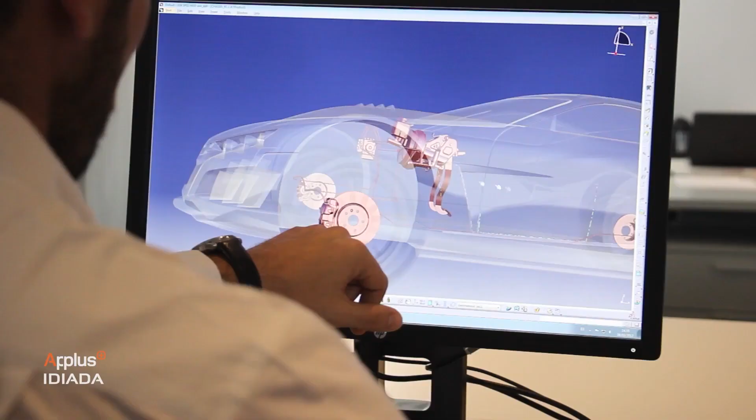Located in the city of Toowoomba, Queensland, Gondwana is a full-service automotive testing and development facility, incorporating an international standard mobility knowledge precinct and the Gondwana Mountain TT Circuit, the most useful and challenging homologation and prototype test circuit ever built. This project is going to be a nationally significant project because it'll develop the motor industry in Australia that it hasn't seen since we closed down all production in Melbourne.

Since early 2020, Applus+ IDIADA has been collaborating with the Gondwana team to develop and ultimately operate a class-leading, future-focused mobility R&D site and ecosystem, including a full range of test facilities and circuits, creating a powerful value proposition for the world's automotive innovators to create the next generation of mobility in Australia.

In Australia, we just have one proving ground located in the south, so there's a lack of testing facilities. Queensland, and the region around Toowoomba in specific, offer a lot of ingredients which serve such a proving ground very well. That's the reason.

We are pleased to work with the Gondwana team to co-develop the master plan design, including selection and planning of test tracks and facilities and supporting infrastructure, based on our international experience and understanding of current and future vehicle development needs. Built from the ground up, Gondwana allows vehicle manufacturers the ability to test current and emerging vehicle technologies efficiently and securely.

Well, the automotive industry globally is being disrupted on many fronts, primarily around technology. Vehicles coming out of the factory today have sensors, computers, wireless communication, automation. Around the world, vehicle testing facilities have been based on vehicles designed 20 years ago.

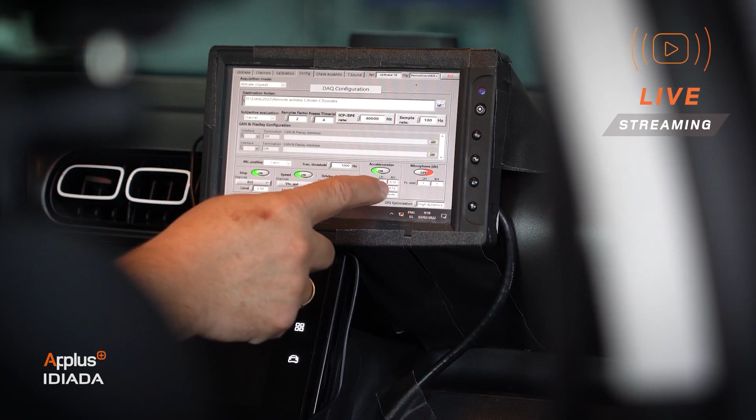Now we need many technology layers. You need high-tech facilities to test all of the technology that's embedded in motor vehicles now. We're dealing with the new parts of the motor industry, the electric parts, the autonomous parts of the motor industry. It's not just a test track going to move a car around.

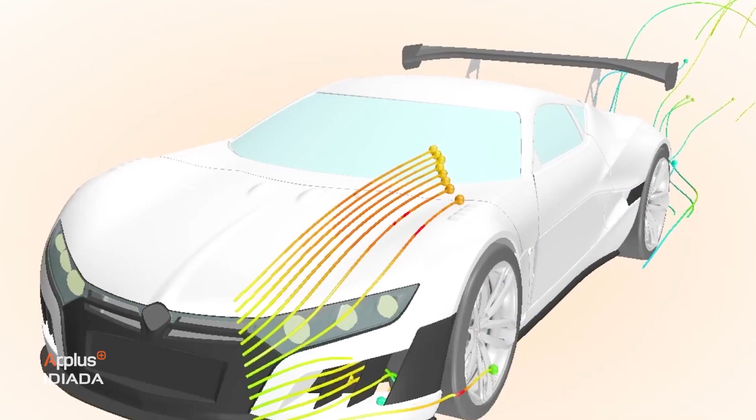This is not what modern testing is. Modern testing means, for example, cybersecurity. There is a lot of high-tech testing to be done in future. Our advantage will be that we can see that and we can design it from scratch. You are in a position to design the facility as state-of-the-art. You will have an advantage over all the existing proving grounds.

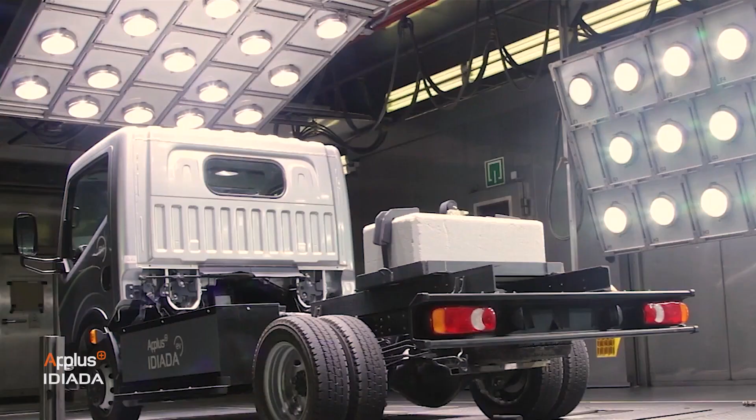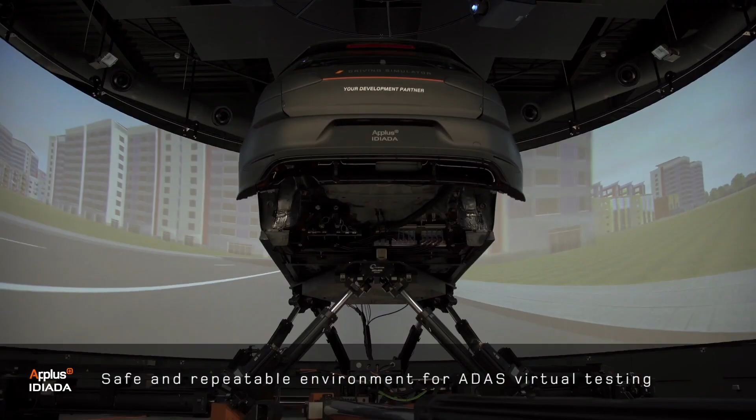With a full complement of R&D smart lab facilities and vehicle test beds and a cutting-edge autonomous mobility centre, Gondwana offers the most advanced testing technologies of any mobility proving ground in the world. The Gondwana facility is equipped with the latest state-of-the-art technology ecosystem. We'll be able to connect vehicles to vehicles, and vehicles to the infrastructure that controls the signals on the road network.

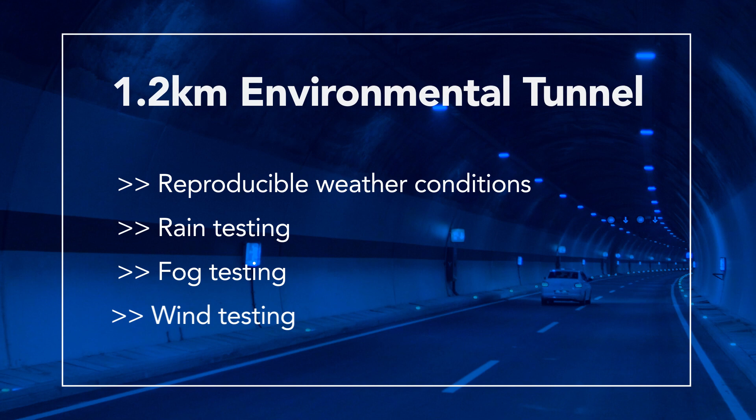Let's take the environmental tunnel. When I think about it, the long test track, the mountain track, just to name a few. We are talking about a 1.2 kilometers long environmental tunnel. An environmental tunnel offers, of course, much better opportunity to go for reproducible conditions.

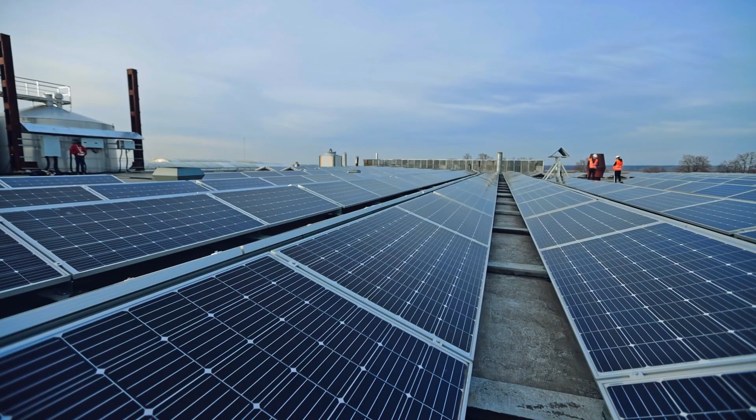Gondwana will also feature a self-contained electricity microgrid, providing an uninterrupted power supply with all power generated on site from a mix of sustainable sources to meet the needs of the entire facility. Electric vehicles are going to be the predominant manufactured vehicle in the future. Existing vehicle testing facilities around the world are going to struggle to meet those charging needs. We have that capability from day one.

Another part of the electric vehicle world is that very large vehicles are going to become electrically powered, such as trucks. They might have a 200 kilowatt hour battery in them, and the grid would be completely unable to charge that in less than 5 or 6 hours. We will provide that capability in a fraction of the time.

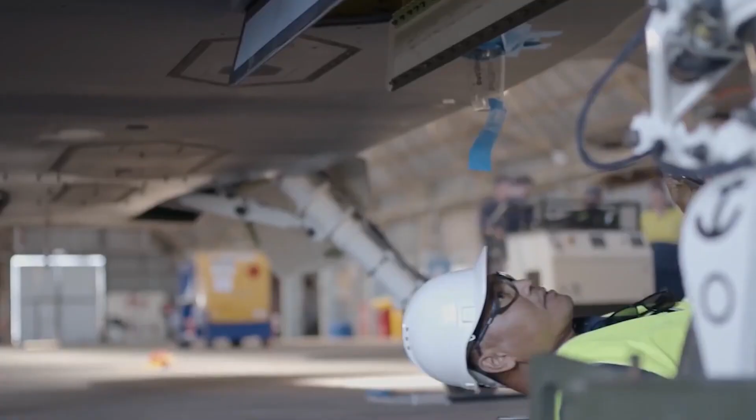Toowoomba is a diverse and multicultural regional city, offering a wealth of opportunity to both industry and residents alike. With an advanced aerospace and defence precinct, as well as the new Gondwana proving ground, Toowoomba is set to become a global epicentre of technology, transport and manufacturing.

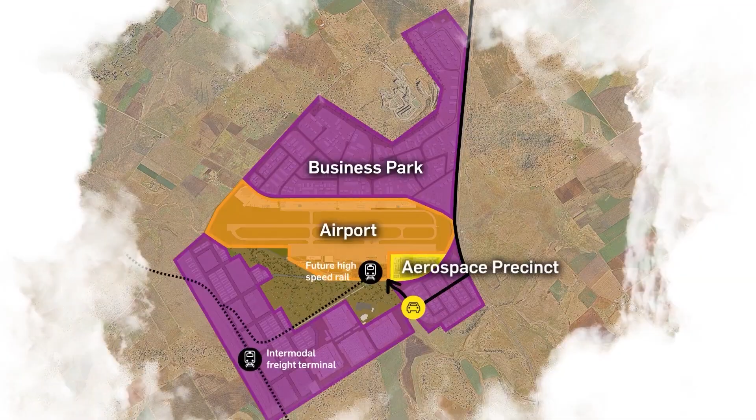This thriving and highly capable ecosystem that has seen the growth of many new industries is a key enabler for Gondwana. This will create a new skilled workforce to do with all the new levels of mobility that are coming. Gondwana is a job machine, if you want to call it like that.

Construction to start with. If you talk about all the companies that we intend to lure to the facility, it will be a tremendous amount of jobs. We say it's going to be as big as the Olympics, well, it's going to be bigger than the Olympics. That's a perfect chance for Australian engineers to get into the knowledge of the automotive industry.

SAE International is the largest and oldest standardization organization in the world. We have more than 100,000 engineers as members. There's a big research community that we can tap into in Australia, and we can work on training research activities together in a site like here in Queensland.

After 30 years of creating, managing and using proving grounds and other test facilities for the world's automotive industry, IDIADA has a strong record of creating and running automotive development and testing facilities and programs.